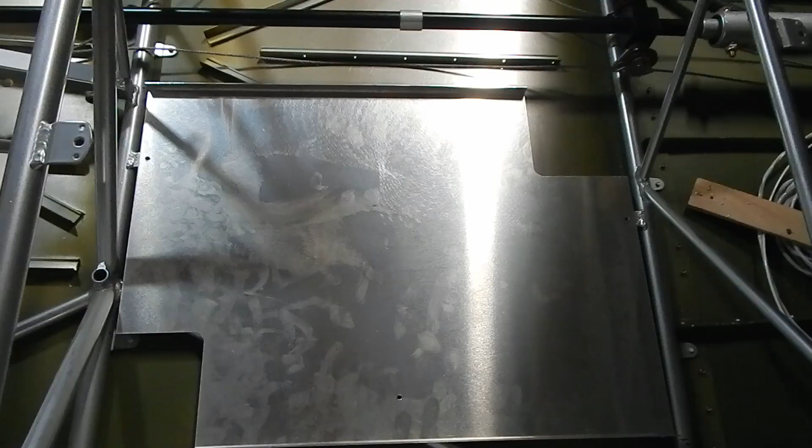The next step is to transfer drill from 3 tabs into your mounting plate. I use this hole finder again that I made. I've showed you this before.

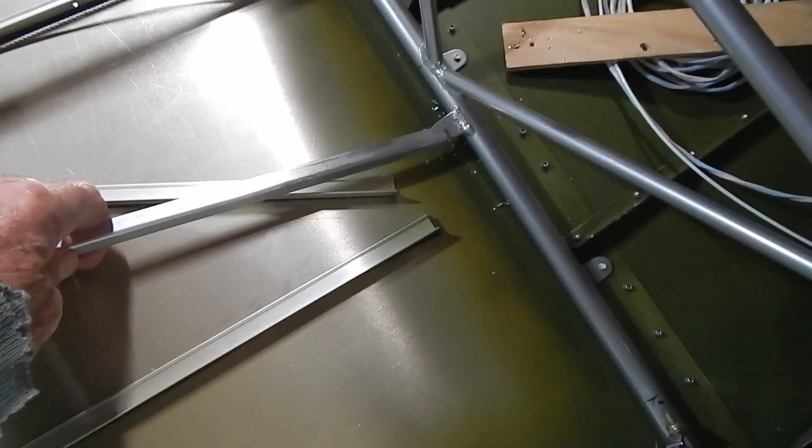And then from there, this comes out, and you've got a support angle. The support angle is going to go underneath this tab here and underneath the tab there, and then there's going to be 2 rivets attaching it to your mounting plate. Then you've got to cut a notch in your angle to clear this support stringer, and then you attach this to the plate and then attach the mounting plate into the plane.

I did prime the end of that support stringer, or the ends, that's where they come in contact with the stainless steel tabs. And I primed the bottom of the fuel tank header tank tray, because that also comes in contact with the stainless steel cage tubes.

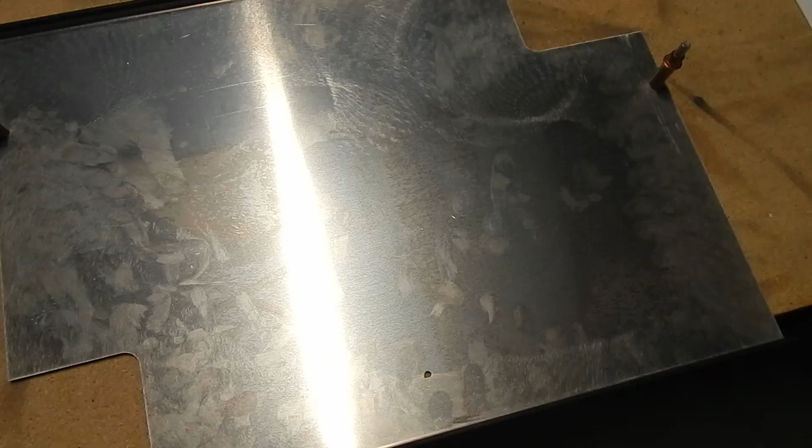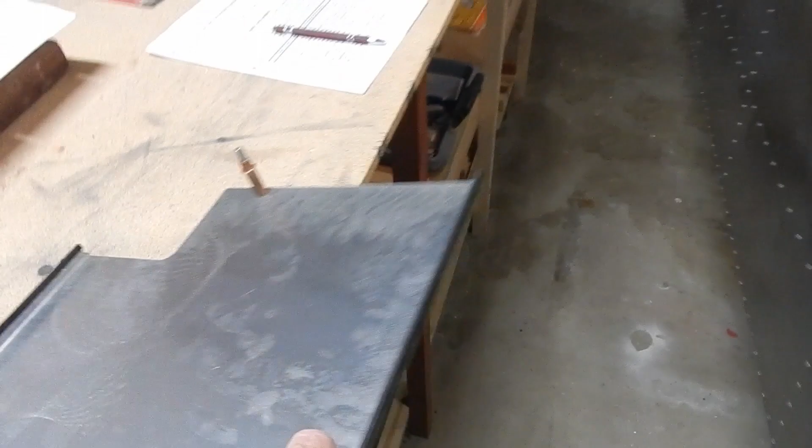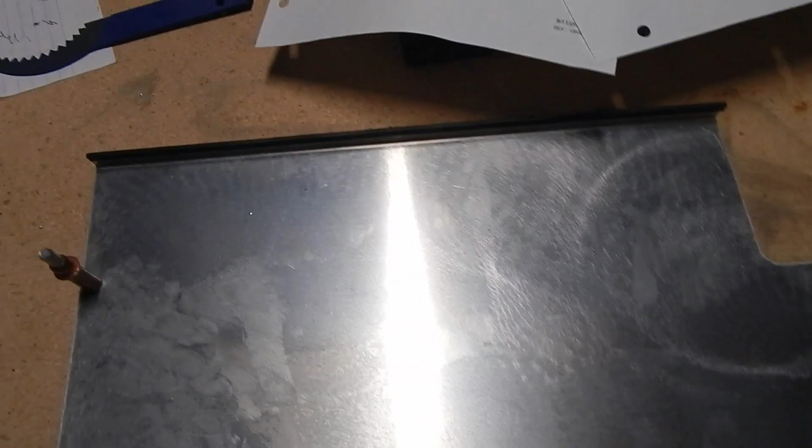And don't forget to prime the bottom of the fuel pump plate, as it is coming in contact with the cage.

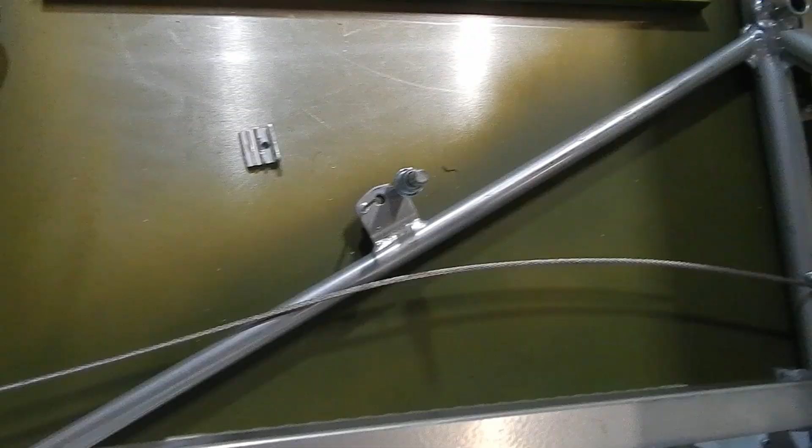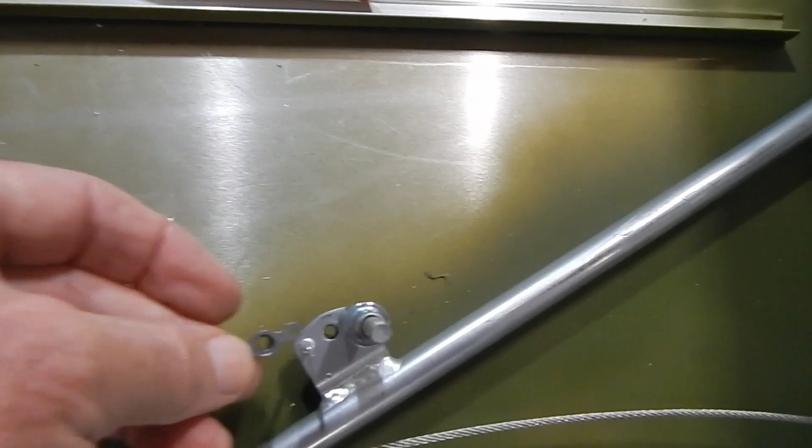There are 4 nut plates that have to get riveted in - 1, 2, 3, 4. These are the little nut plates that go underneath the tabs. Because you have to cleco one side, that doesn't give you much room. I use this little piece of aluminum angle brace that lets me put it flush. I can bend the rivet, put my rivet gun on there, and still get a flush rivet. I've talked about this piece before, but use whatever method you can to get your rivet gun in there. These 4 have to get riveted.

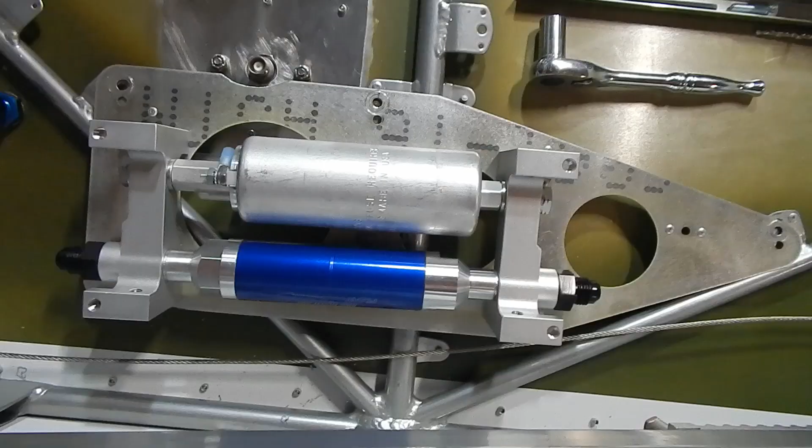Yeah, I think I found a slight error in the punching. This fuel pump gets mounted to this plate, this mounting plate.

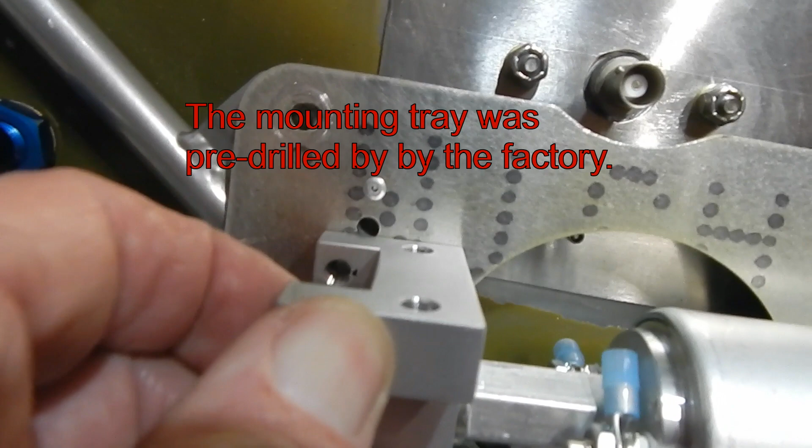You put a bolt through here, through the nut plates you've riveted on. I've got the front bolt in, but this back bolt is off by about 1/8 of an inch, and it's about 1/8 inch high. So I'm going to drill out this nut plate, re-drill the hole for it, and re-rivet it. I'll have to put these rivets in some different locations and get that nut plate moved so it'll receive the fuel pump, because it's not going to fit this way. I guess when they pre-punched this plate, they missed the measurement. That's the only thing I can think of, so we'll go with that.

I've reinstalled these nut plates under here just by twisting them a different direction and re-riveting them that 1/8 inch off they were. So this fuel pump mounted nicely onto the bracket.

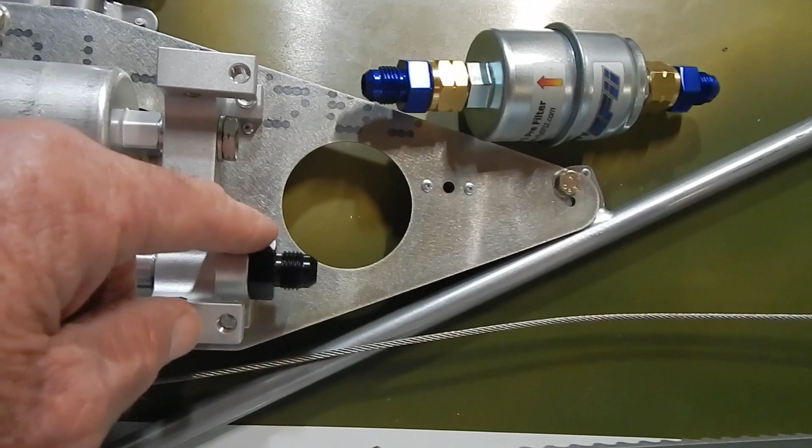The next thing is to attach the filter, and they're saying you have to do what's called a short configuration. This fitting I've already loosened, this comes out. There's an O-ring here that's going to go onto here, and then this is just going to become installed into here, and there's a bracket that's going to wrap around and secure the filter onto that.

The other thing is, I have a feeling I'm going to have to take this off. There's 2 wire connections to run the fuel pump, and the second one is going to be really hard to get in there, so I may have to take this off one more time to get the wires onto it. But right now it's just the 4 bolts, and it'll lift right up, so that's not a problem.

This is the fuel pump in what's called the short configuration. This just went right in with that gasket or O-ring on there. This looks like I'm going to be okay.

I trimmed this plate just a little bit so I've got room to hook my antenna up here. There's a servo that goes over here, but it looks like I've got more room on this side, so probably by lucky guess by where I placed these. If I had placed these any further outboard, I would have been in a lot of trouble. So I think I got away with the placement of this antenna. But before you place your antennas, definitely think this through. With that servo coming up this side, I'm not sure that's the best place for it, but for now it's going to work for this plane.

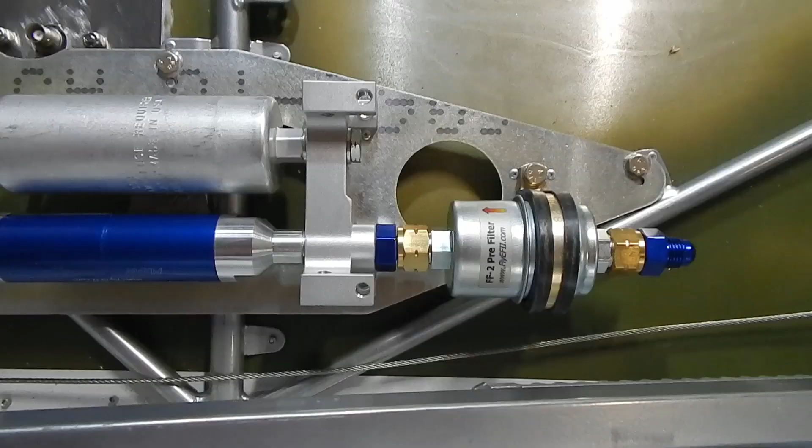Okay, it's in there now with the strap around it and through that last nut plate, and the hole marking here is going to give just a slight curve up to this fuel filter. So I'm okay with the holes where they've marked. So the next thing I'm going to do is work on the fittings for the header tank.

Well, you can never stop thinking about this. I think I've got the gauge - as a matter of fact, I know I've got the low fuel sensor in upside down. When that float goes up, just like a toilet bowl, that's going to make the connection, and when the tank is full, that float will be up all the time. And when the fuel level gets low, that will drop the fuel float down. That's actually opposite of what you want. You want it flipped over so that when it's full, it's holding that connection away, and when the fuel level drops down, it makes the connection. Pretty obvious, but I had to think it through. I'll just flip it around, no big deal.

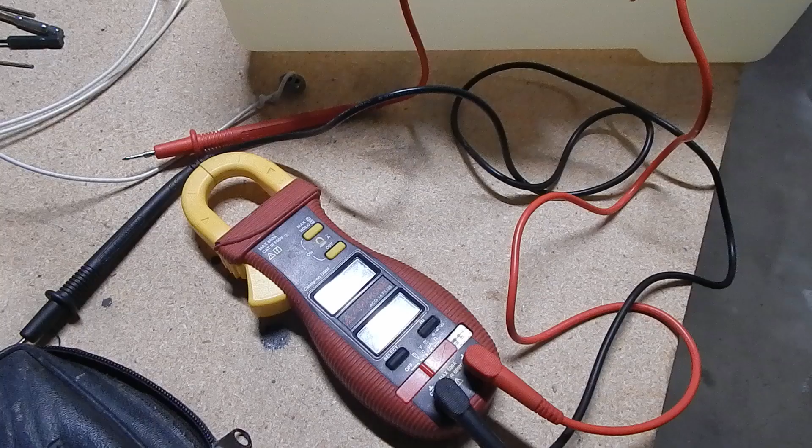I also hooked it up to my meter just to make sure that when the connection was made, there was no resistance with ohms, and that when the connection was separated, there was resistance, and in fact it passed the ohms reading. So my wires are good. I get 0 resistance through both wires when the contact is made. So we're in good shape, I just got to flip it around.

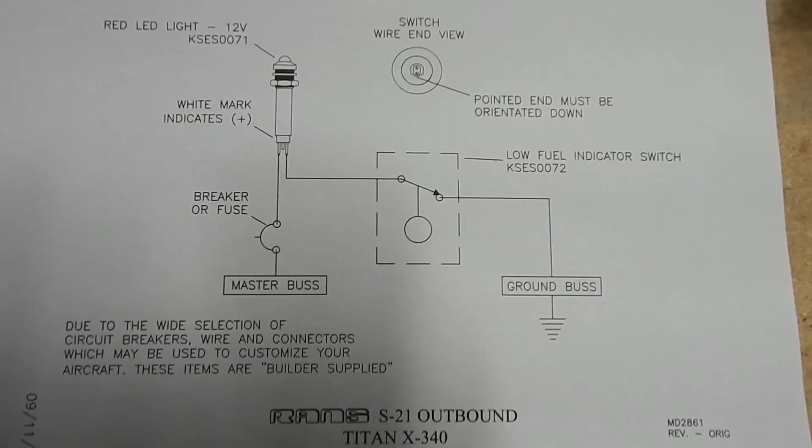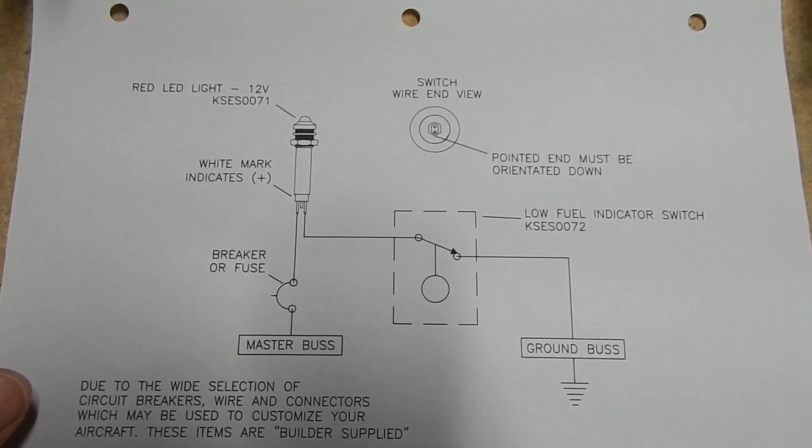One other quick comment about hooking up the low fuel light. You notice the light is operated off the ground, and that you put a breaker in that goes to your power. Obviously they don't want power running to the gas tank, so they're using the ground to complete the circuit, and the switch is controlled by the ground, which is not that uncommon, but just an observation.

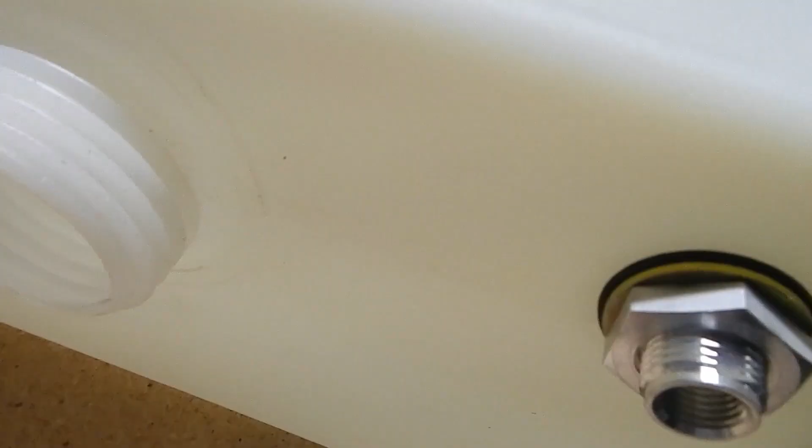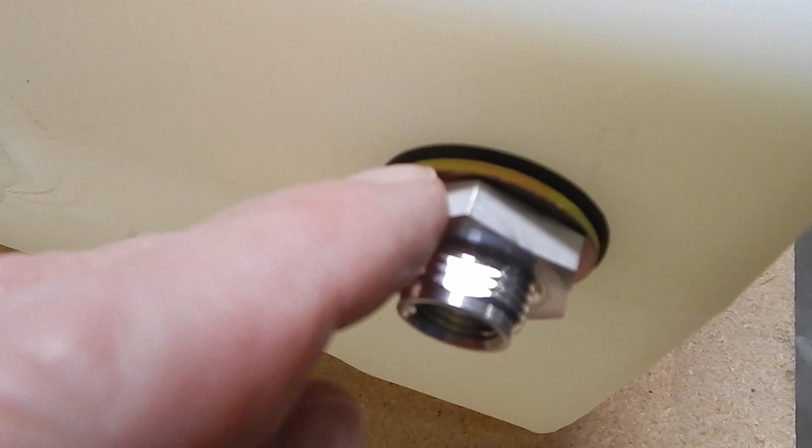The way I run these fittings and snake them is I take a wire, about a 14 gauge wire, and put the fitting and the O-ring on it. At the end of this wire, I've got a little nut so it won't go through the O-ring, and I've attached some string so I can pull it back out. I feed the wire into the tank, get it over to the hole, use some hemostats to grab it, pull it out, and then pull it in until it becomes flush. I lock it in with a nut and all the other fittings, since it needs another rubber washer, a metal washer, and a reverse nut. I tighten it in, and then use my pull string to pull the feed line back out.

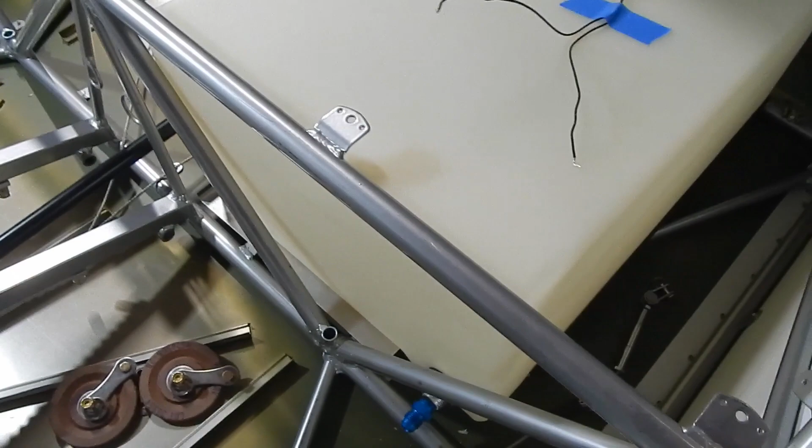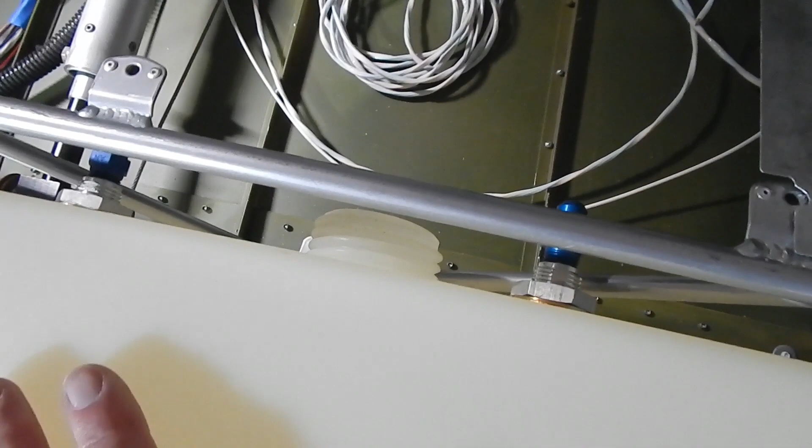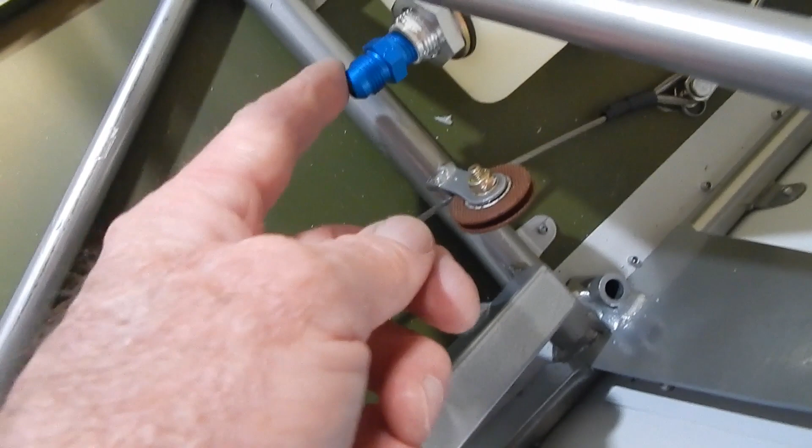I really struggled getting this tank in and out even before I put the fittings on. There's no clearance here, and if you come to the back, there's no clearance here either. So getting this tank out with the fittings on, or getting it in with the fittings on, wasn't going to happen. So I put the tank in and then attached the fittings after the tank was in with the sealant. But now I need to pressure test it. I've got a cap, and I'm going to cap these two ends and hook up some kind of pressure system into this one so I can pressure test it with the tank in the plane. I've seen other builders do it outside, but I'm not sure how they got the tank back into the plane with the fittings on. So I'm going to move forward this way, assuming I can do my pressure test with it sitting in the plane. Then I've got to figure out how to get my sump drain on, which goes down on this back corner. I'll take it one step at a time and see how it goes.

Once again, my faithful assistant is making sure I'm doing my work right, keeping an eye on me and keeping me company.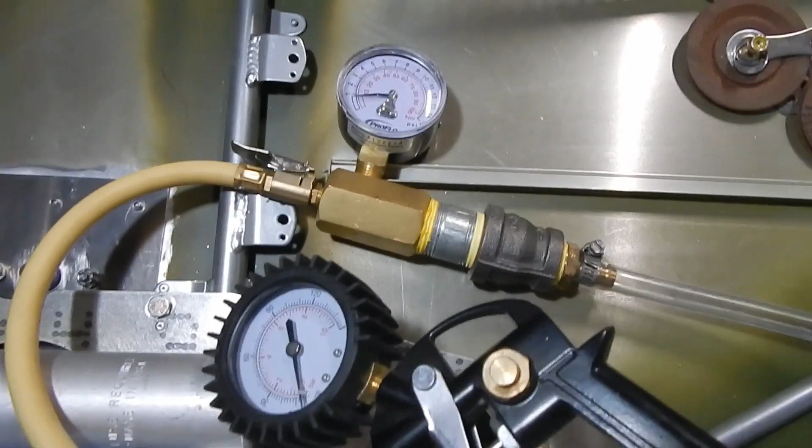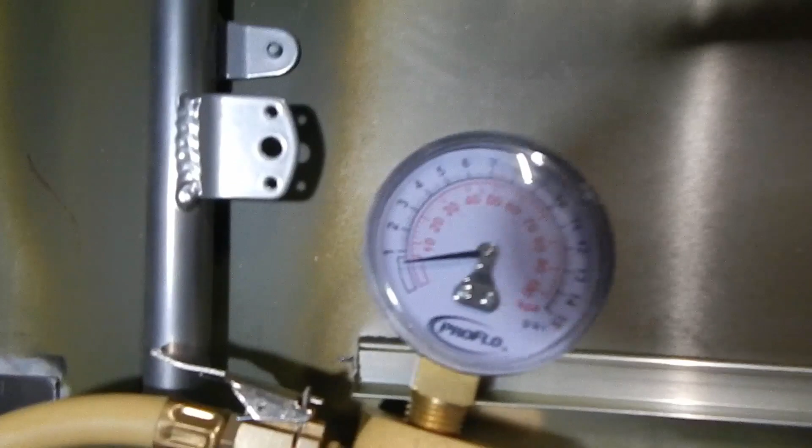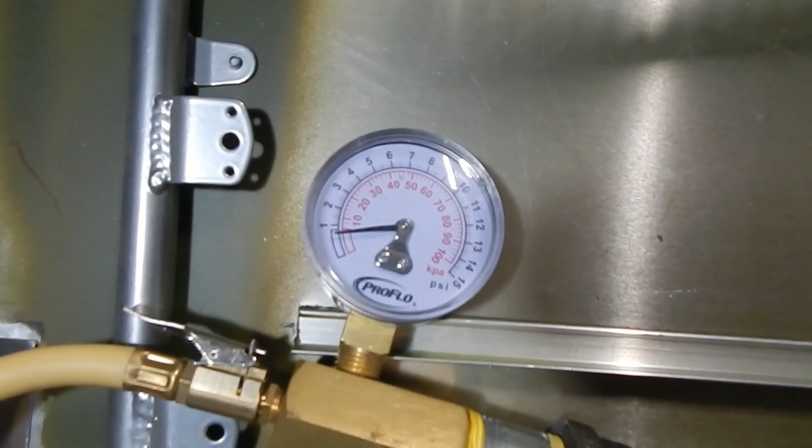What I'm doing to pressure test the header tank is I took one of the fuel lines, looped it, and attached it to my two fittings. Then on the bottom fitting, I attached a hose that I clamped onto the fitting there. This is my contraption that takes my pressure gauge down to a hose, and I put about 3/4 of a pound of pressure in it. The tank started to swell a little bit, so that was my indication that was enough pressure. Then I'm using leak detect bubble solution and swabbing around all the openings, including the cap, to see if I see any bubbles. I took a mirror and looked underneath to check for bubbles under these fittings. Then I'll leave it there and watch my pressure. It's up about 3/4 of a pound, and I'll leave it for a couple hours to see what we've got. It's been about 5-10 minutes since I got the camera and started filming, and it looks like we're good on the pressure test, but we'll wait.

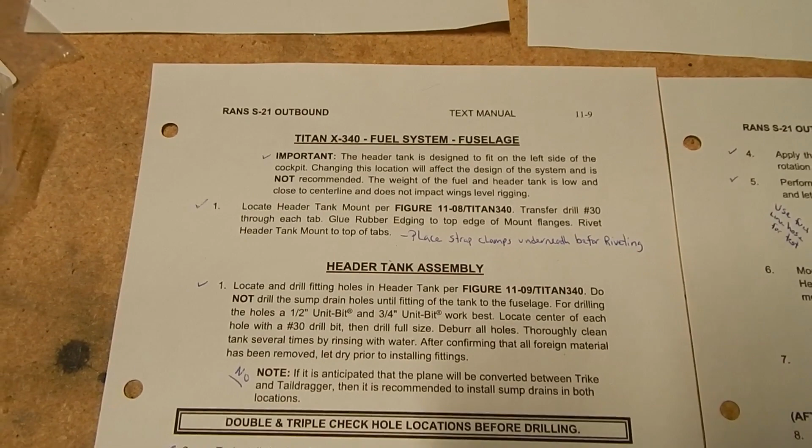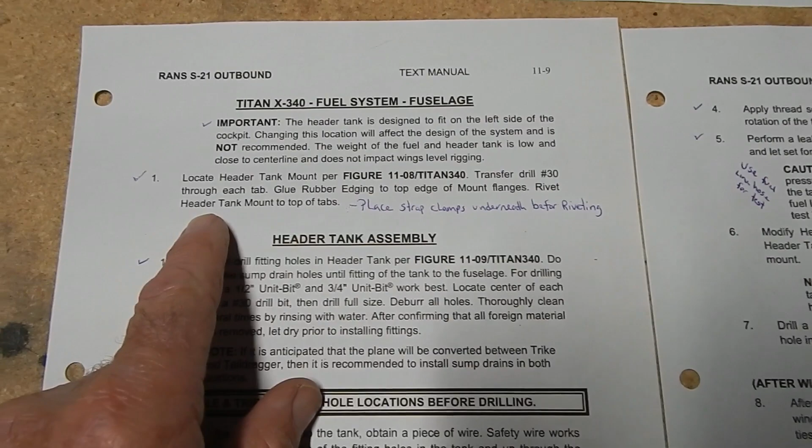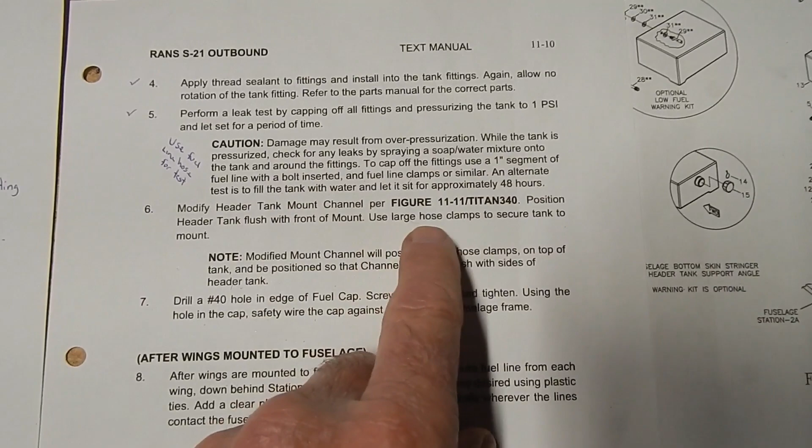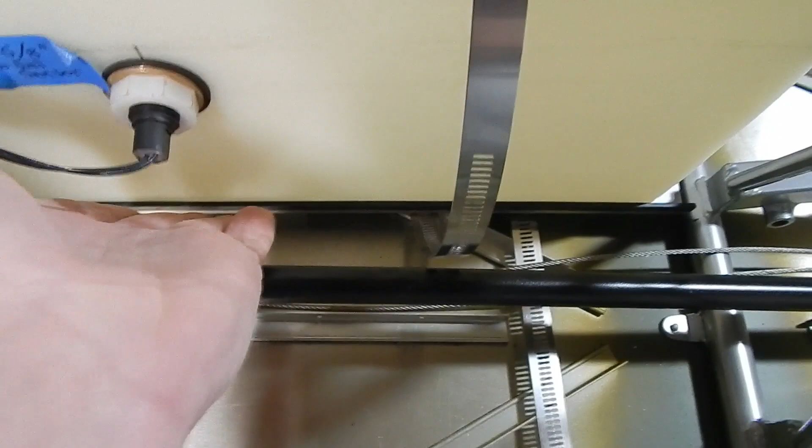Okay, a little gotcha in the header tank installation, and I'm not sure how I'm going to fix it at this point, but I'll point it out. They start with mounting that header tank plate, and they have you rivet it down to the frame. Then you put the fittings in, then install the fittings into the tank, then perform the leak test. After that, you put the tank mount channels in and use the large hose clamp to secure the tank, all using this diagram. So all's well and good following the instructions, except using these large hose clamps is step 6, after everything else is done. The problem is I've got the tank in, and these hose clamps won't go underneath because of all these stringers and supports - you've actually riveted a tank support in place. I can't get it. I've been screwing around with this for about 2 hours, and I can't.

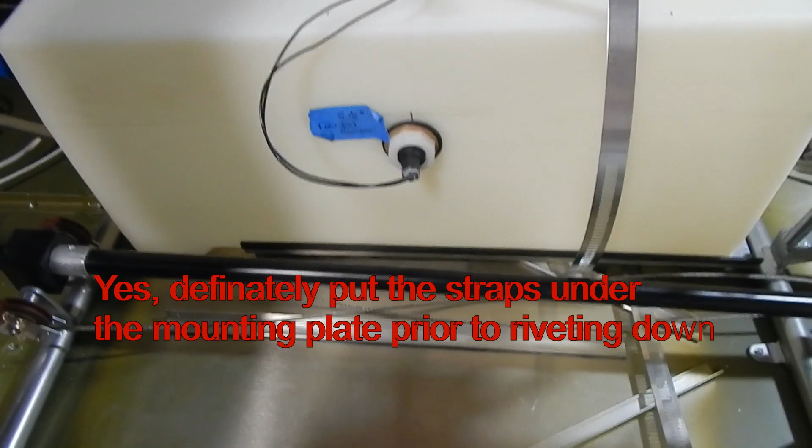This one I finally got from up here and was able to thread it down, but I can't get this second one anywhere close to going in under here. As I jam it in, I try and go up, I lift it up, I try and go down. I just can't get it to go under here, and it's supposed to fit right here. So I'm not sure what I'm going to do, but there's no way these things are going to go under there. I did check some videos, and these guys put the straps down first before they riveted that plate down.

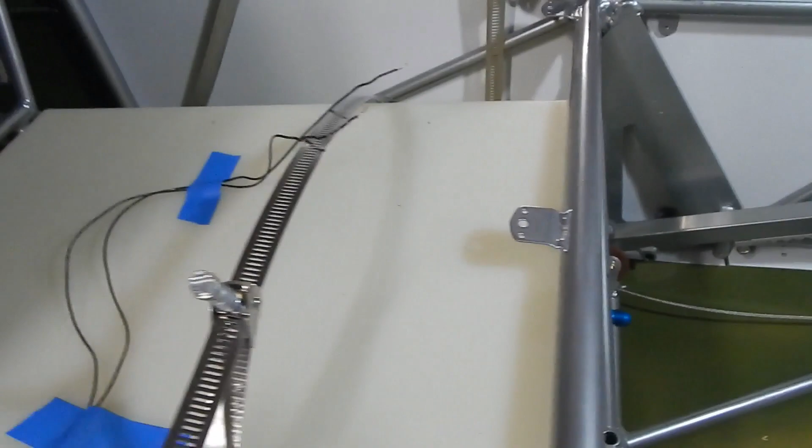That mounting plate, which is, in my opinion, the only way you can do it. My problem is I've got all these fittings on, I've got the tank pressure tested, and I can't get the tank out now with these fittings on. See, it's not going to clear here. The fitting's not going to clear here, so I've got all these fittings on. I cannot get this tank out to try and get underneath that plate without taking all these fittings off.

A real frustration. I'm not exactly sure I'm going to fix it at this point, but make sure you get those straps on underneath that mounting plate before you rivet that mounting plate down to the frame tabs.

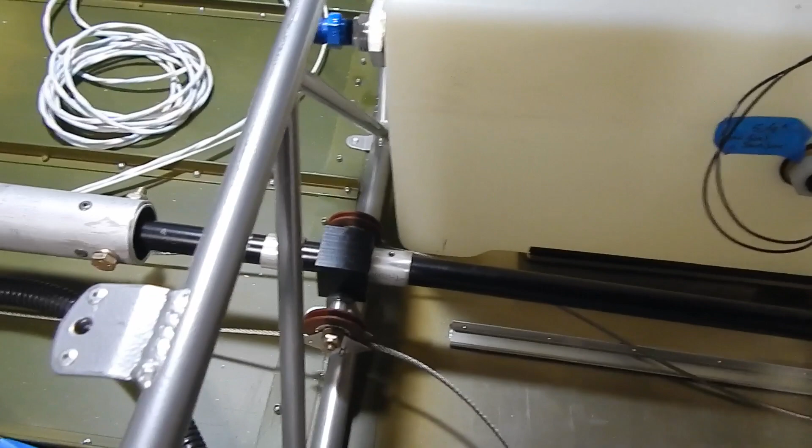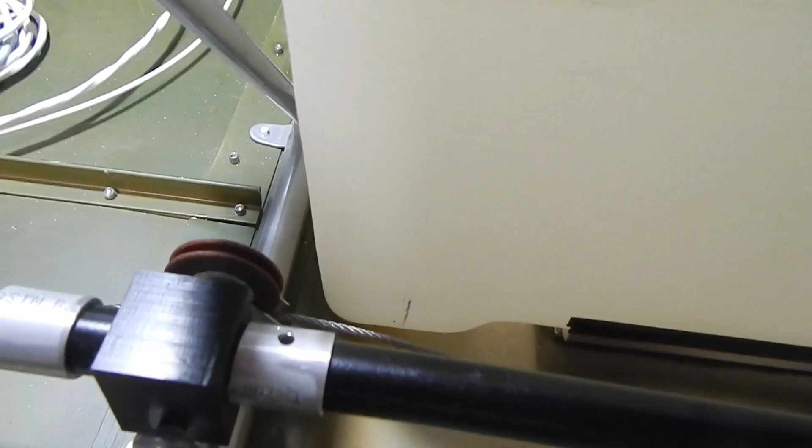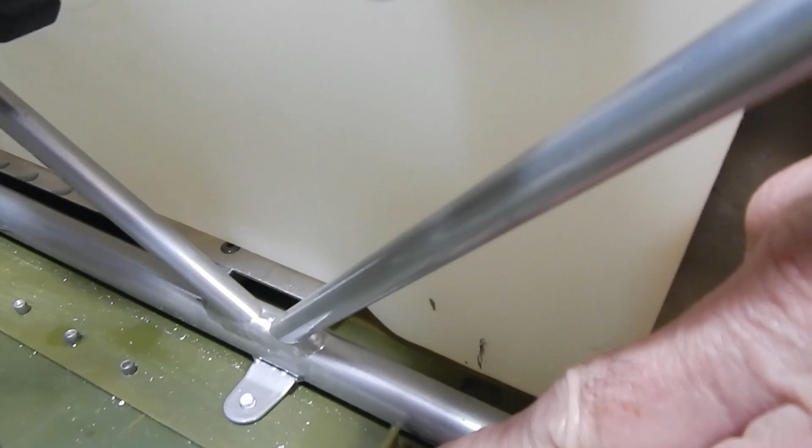My next step is to try and get this sump fitting in, and I've got a tail dragger, so it's the aft location. I'm able to locate the center of the tank, that sump part of the tank, with a line on that side and a line on this side. I've got that location. I can use calipers and measure that center point from this rivet, so I could drill from the bottom in the center of this sump based on the measurements that I've got with the tank in place.

The problem is I can't move the tank out with these fittings. The tank's not coming out. I can lift it up if I need to get it away from the floor, but it's not coming out again unless I take all the fittings out and retest everything, but then I'm in the same location. So I can drill the hole coming up from the bottom.

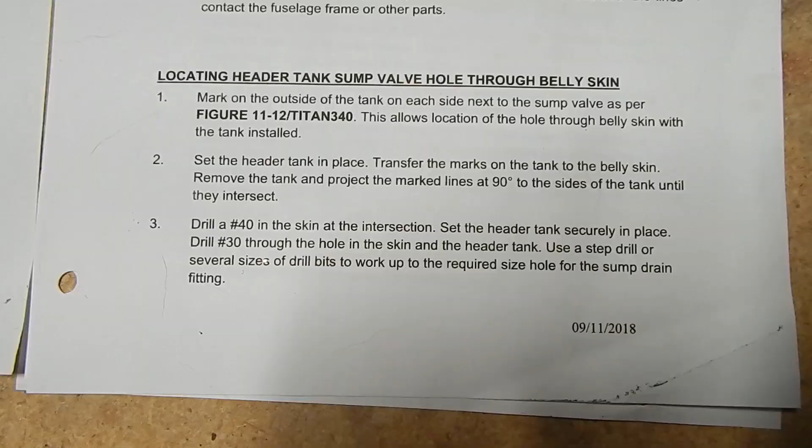It's supposed to be a 3/4 inch hole for that last fitting, and the directions don't give you a lot. Really, all they tell you is to mark the outside of the tank using the figure. Here's the figure. They tell you to mark the tank for the sump drain. They give you the measurements. They tell you the hole needs to be, it's going to be a 1/2 inch total, 1/4 inch on either side from the largest part of the bulkhead.

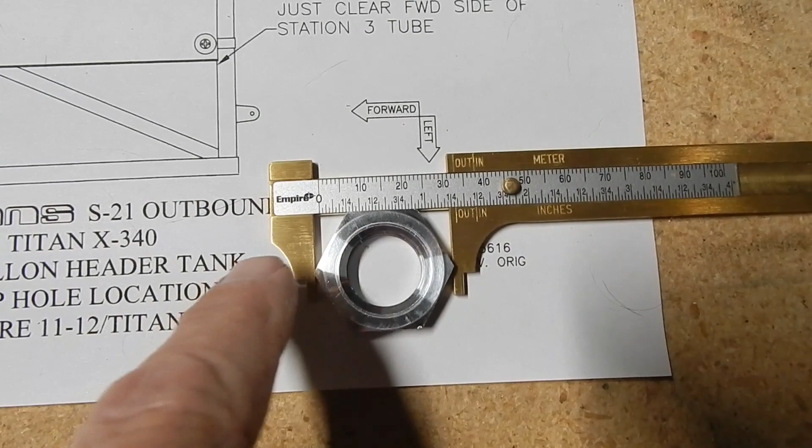I measured the size of the nut, which is 1 1/4. So the bulkhead skin size will be 1 1/2, but I need a 3/4 inch hole through the tank for the fitting. Yeah, I got to figure this one out. I don't have a good solution here.

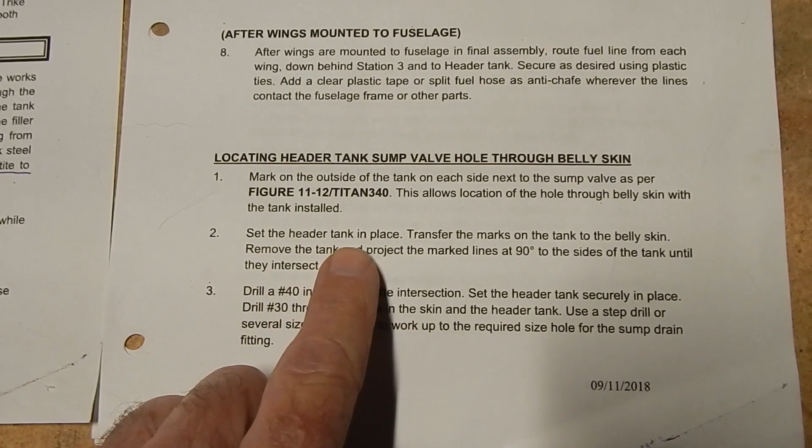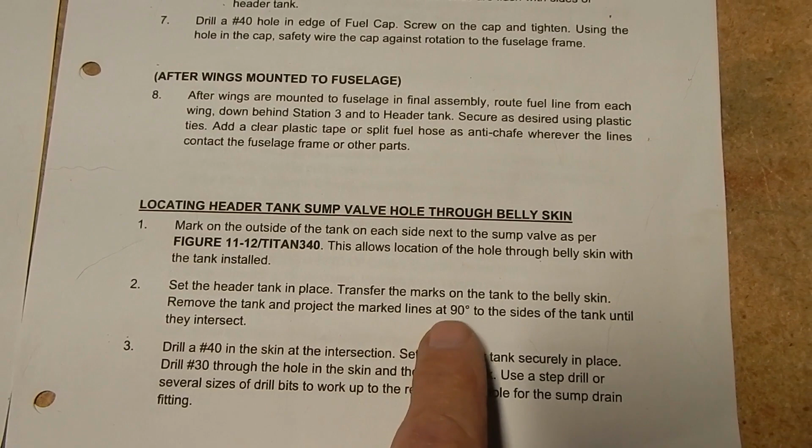The directions here tell you to set the header tank in place. Well, I've done that, and per the directions up here previously, it's all strapped in. It tells you to use the straps and to strap it in, which is the other struggle that I just talked about. Now it tells you to set the header in place, transfer the marks to the belly, which I've done, remove the tank, and project the marked lines at 90 degrees to the tank.

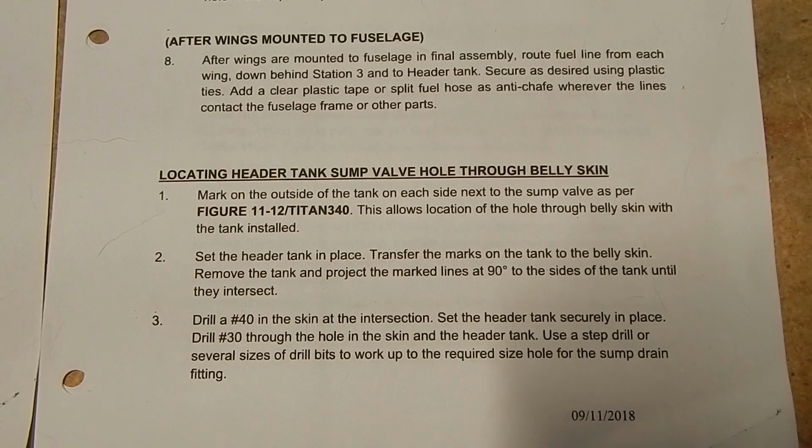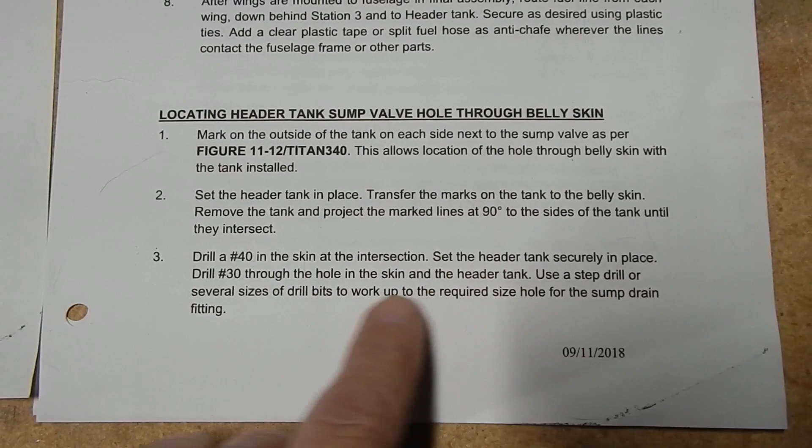Well, I can't remove the tank. We've already decided that's not going to happen. I've got the marks, and with calipers I can measure them without moving the tank. Then it says drill a number 40 to the intersection. I could drill the 40, set the header tank back into place, and drill a 30. Well, with the header tank in place, I can drill the 30 in that mark.

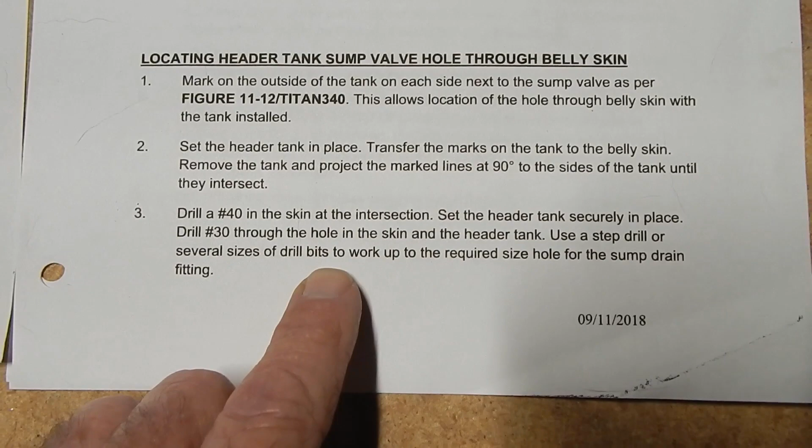Use a step drill to get to the size of the bit, which would be the 3/4 inch hole. And then that's the end of the directions. It really doesn't tell you how to get the nut on or anything else. So...

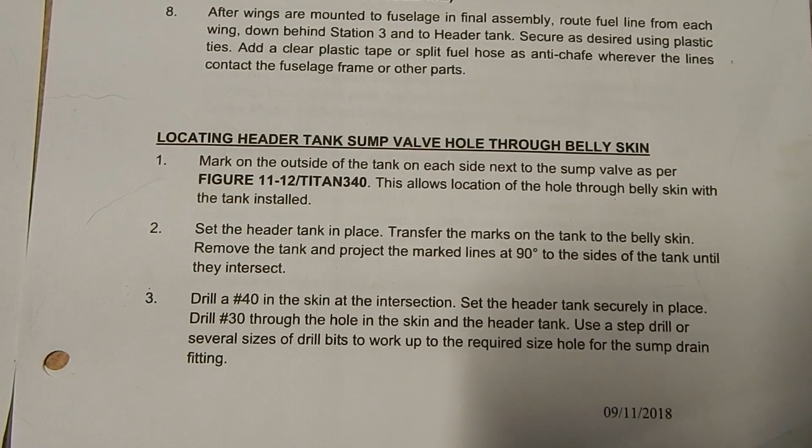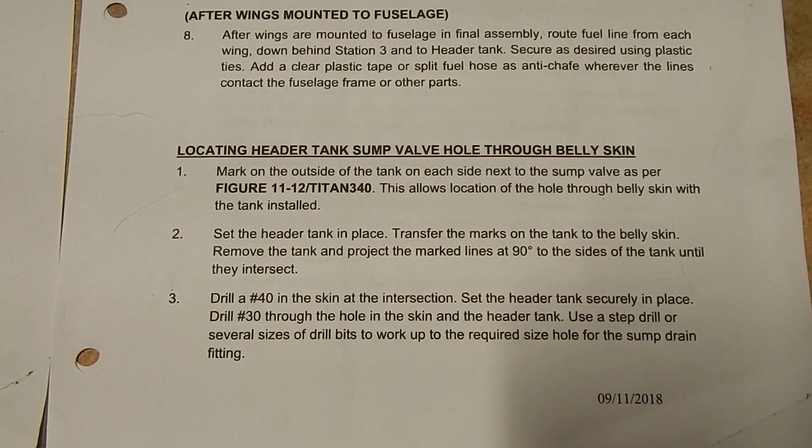Okay, I think my only option is to drill up from, measure it with calipers, find the center, and just drill straight up through the skin and through the tank, 3/4, get that nut on, and then drill this bottom skin to the 1 1/4.

I think that's what I'm going to do. I'm going to drill a number 40 hole, and if it's not exactly dead center when I take the tank out, I can adjust it up to 3/4 of an inch if I have to move it a little bit, but I think I can get it pretty close to dead center.

In order to get the tank out, I'm going to have to remove these blue fittings. There's no other way around it. I can re-pressure test it after I put it in. I've pressure tested for this, but when you remove these fittings, you take a chance of moving them a little bit, which can create a leak. So I'll take these out in order to get my tank back out.

That's also going to allow me to slide my strap underneath. I may have to drill out that plate from the rivets to get the strap underneath, but I can't think of any other way to do it. So that's going to be my strategy. Not a huge amount of work, but that'll be my strategy for fixing this mess.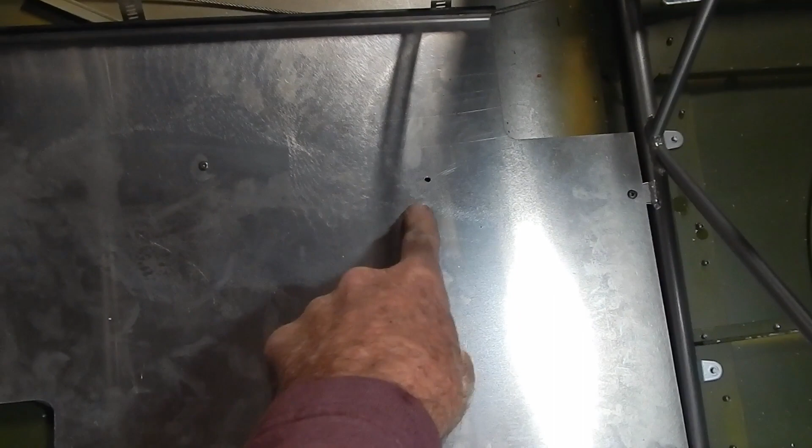Step 1 of the fix is done. I pulled the rivet out here, and I was then able to feed the strap underneath. So that's the strap that I need to get done. This one was already there, so we're on our way.

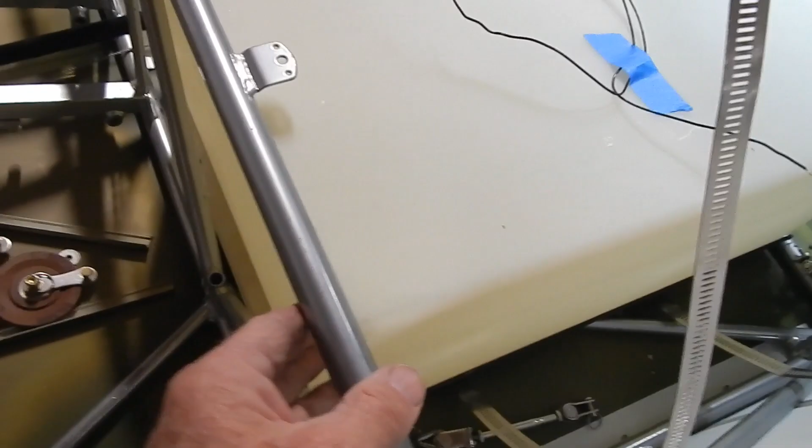Okay, I've got the tank back in. The straps are located where they're supposed to be. If I didn't mention before, I will mention it now because I saw it on another video - Dad and Chad had the same problem. Sometimes when you lift this tank out, this back corner gets caught on this plate.

I struggled with it 2 or 3 times and actually took a small gouge out of the bottom of the tank. Dad and Chad did the same thing, and they warned that you actually have to take a screwdriver or something and hold down the plate underneath here when you lift the tank out, because some of them catch when you get it out. You're pulling it and working it and not figuring out why it's not coming out, and sure enough, it's caught on the edge of this mounting plate, so you've got to kind of hold it down.

So now I'll put the valves back in. This valve was in, but I've got to replace the valves in the back. I've got the sump underneath - if you can see under here, you can see how it comes through here.

I'll put the valves back in, or the fittings, and do another pressure test now. Now that I've got it out, I've got to start it with another pressure test. Assuming it passes the pressure test, I'll strap everything in and hook up the line up front.

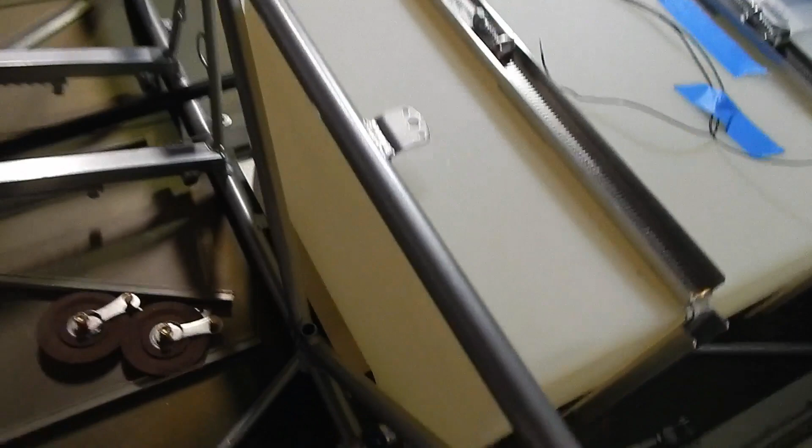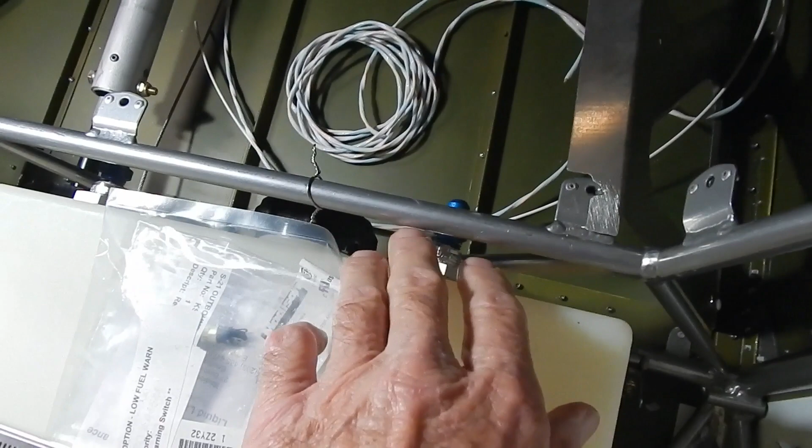Okay, a final shot of the tank. I've got it in, I've got the valves hooked up to the fuel pump, I've got these channels in, the straps are in. I retested the pressure, I've got these back valves in, and got the cap safety tied.

Underneath, let's see if I can get under here. You can see the valve coming down, and they've got a fairly long one - that's the fuel sump valve. I've seen some others with another option on there. You can get a different one, a shorter one, but that's what they sent with the kit. That's on there and pressure tested.

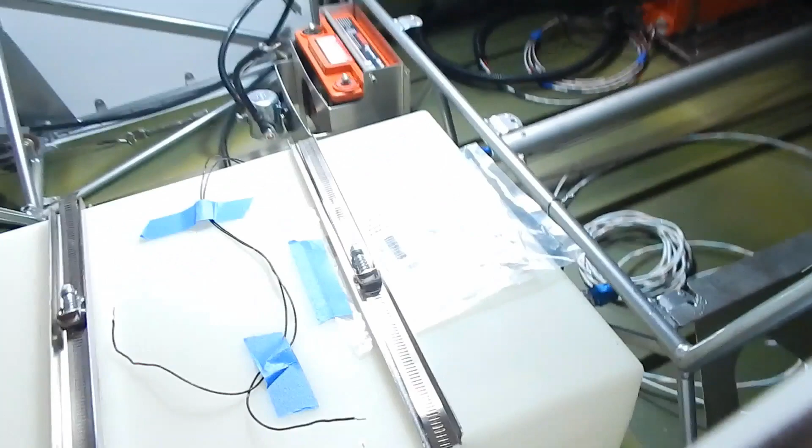So, tank is in, fuel pump is connected. I've got some room for my antenna. That was a struggle, and I'm glad we're moving on.

Well, that's probably a good place to end the video. That segment took me 27.1 hours with all the mistakes, and the redos took probably longer than it should have. That brings my build time to 763.6 hours.

In the next video, we're going to get the battery box, gascolator done, more fuel, more firewall forward, the starter solenoid, the master solenoid. I think I can get that all into one video. That all goes pretty quick.